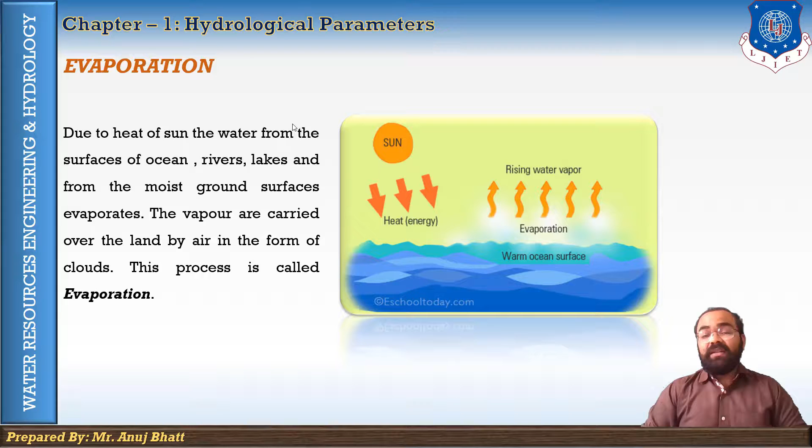Evaporation is the process by which water changes from a liquid state to a gas or vapor state. Evaporation is the primary pathway by which water moves from the liquid state back into the water cycle as atmospheric water vapor. Studies have shown that the oceans, seas, lakes, and rivers provide nearly 90% of the moisture in the atmosphere via evaporation, with the remaining 10% being contributed by the transpiration process that we will discuss in the

next lecture. A very small amount of water vapor enters the atmosphere through sublimation. It is the process by which water changes from solid, that is ice or snow, to the gaseous form, bypassing the liquid phase. This often happens in the Rocky Mountains with dry and warm Chinook winds. When the dry air hits the snow, it changes the snow directly into water vapor, bypassing the liquid phase. Sublimation is a common way for snow to disappear quickly in arid climates.

To continue evaporation, three basic conditions should be satisfied. First, there should be a constant supply of water. Second, there should be a constant supply of heat. And third, there should be a vapor deficit. Why does evaporation occur? Heat is necessary for evaporation to occur. Energy is used to break the bonds that hold water molecules together, which is why water easily evaporates at the boiling point, but evaporates much more slowly at its freezing point.

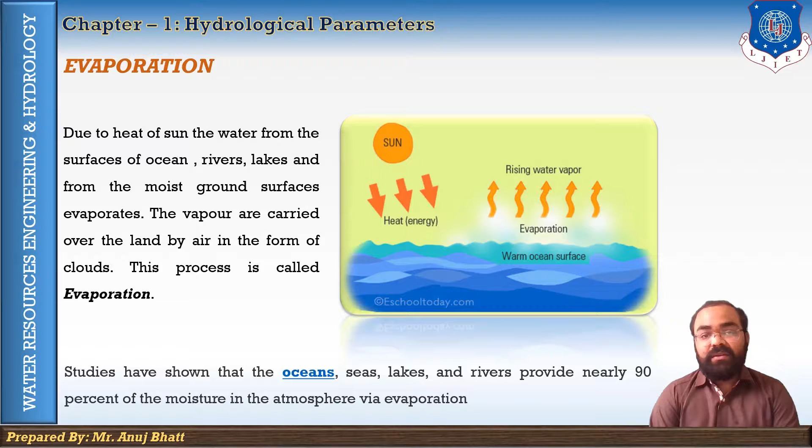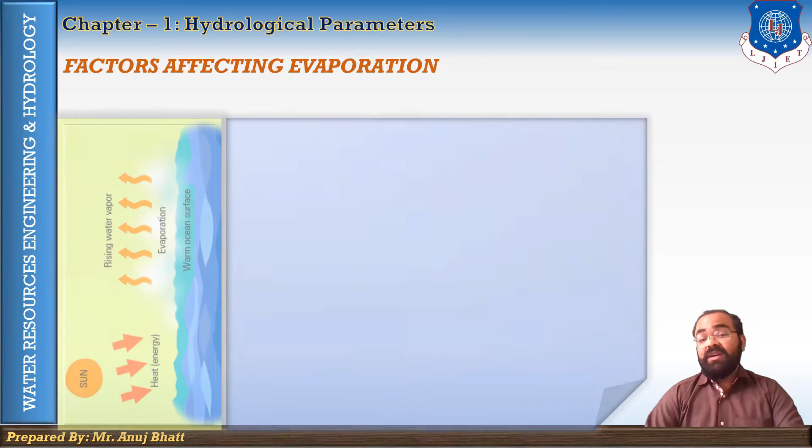Now next, let's discuss the factors that affect evaporation, or the rate of evaporation. The rate of evaporation depends on a few factors. The first one is the temperature of air. Evaporation increases with an increase in temperature, and thus in the summer season and in hot countries the evaporation will be more as compared to the winter season or cold countries.

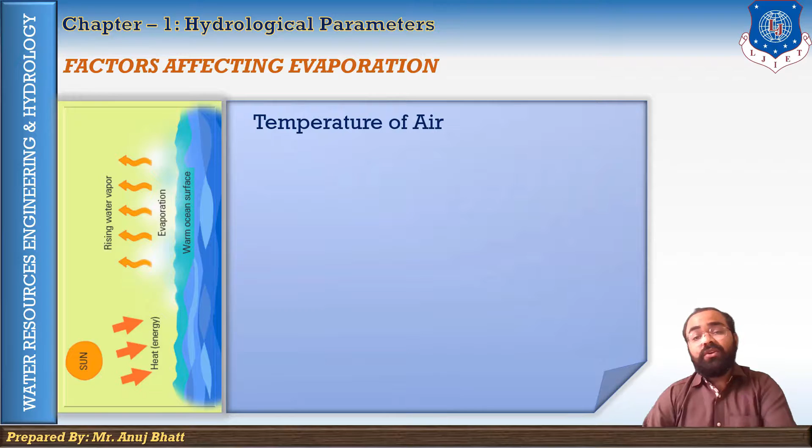The next is the wind velocity. The process of evaporation also depends upon the prevailing turbulence in the air. If the velocity of air is more, the saturated film of air containing the water vapor will move easily, causing more evaporation.

The next factor is the atmospheric pressure. A decrease in the atmospheric pressure always increases the rate of evaporation, because there are fewer molecules in the air above the free surface to cause interference. Consequently, the evaporation is more at high altitudes.

The fourth one is the nature of the evaporating surface. Different evaporating surfaces like soil, barren land, forest area, houses and lakes affect evaporation to the extent of their individual potential. Black cotton soil helps evaporate soil water faster than red soil, because such soil absorbs incoming radiation more effectively, so it can have more evaporation.

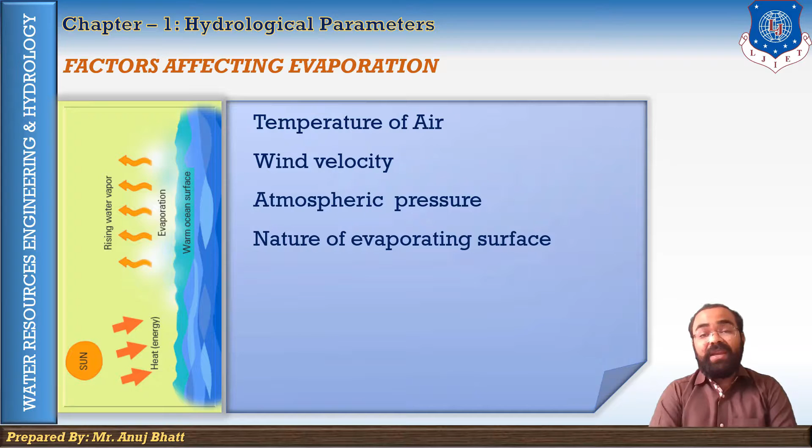Evaporation from wet soil is faster, and it reduces gradually as the soil becomes drier. Evaporation from a snow surface is less as compared to that from a water surface. Moreover, evaporation from snow takes place only when the dew point is below 0 degrees Celsius.

Talking about the area of water surface, the amount of evaporation is directly proportional to the area of evaporation. So if the exposed area is large, the evaporation will be more, and vice versa.

The next factor is the depth of the water body. The depth of water influences evaporation considerably. Deep water bodies evaporate slower than shallow water bodies in the summer, while in the winter season they evaporate faster.

The next factor is humidity. If the humidity of the atmosphere is more, evaporation will be less, and if humidity is less, evaporation will be more. Any dissolved salt in the water reduces the saturated vapor pressure of the water, which consequently reduces the rate of evaporation. Evaporation decreases by 1% for every 1% increase in the salinity of a water body.

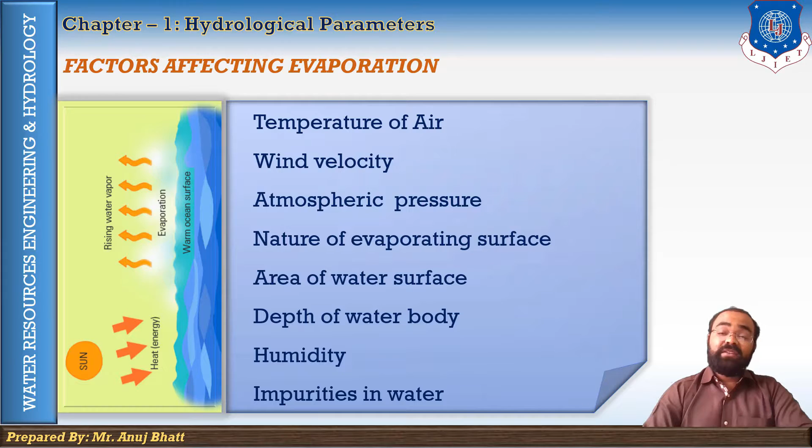The turbidity of water may also affect the rate of evaporation by affecting the heat transfer within the depth of the water body. So these are all the factors that affect evaporation and the rate of evaporation.

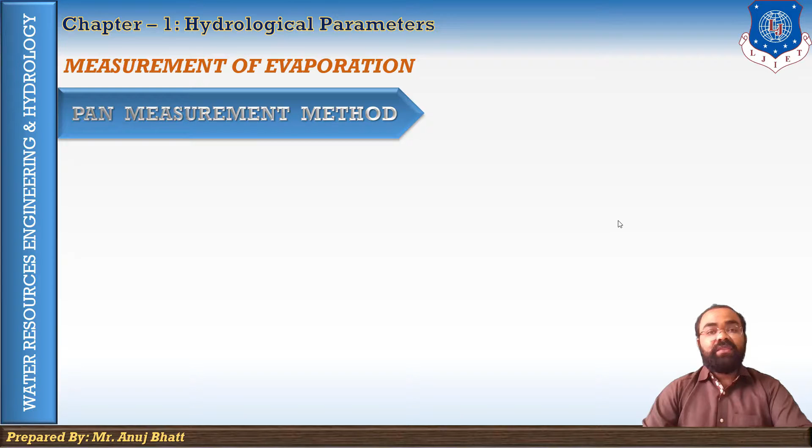Okay, next is the measurement of evaporation. We have the pan measurement method. The most reliable method for estimating evaporation from large water bodies is measurements from evaporation pans. Here, the depth of water evaporated from a pan of a given area in a given time is measured with the help of a micrometer.

The rate of evaporation so obtained is multiplied by a suitable pan coefficient to obtain the evaporation rate from the given water body. The pan coefficient is the ratio of lake evaporation to pan evaporation. In India, there are about 200 pan evaporimeter stations maintained by IMD, so we can easily get the rate of evaporation every year.

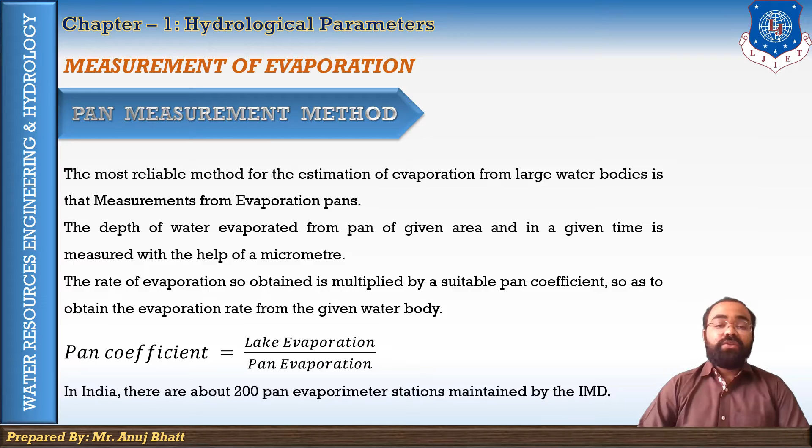Okay, next is using empirical formulas. The first formula is the Mayer formula: E equals Km times (es minus ea) times (1 plus v9 upon 16). For this method we just have to memorize the formula, and by finding all these terms we can find the rate of evaporation.

Here es is the saturation vapor pressure at the water surface temperature, ea is the actual vapor pressure at 9 meters above the water surface, and v9 is the mean wind speed at 9 meters above the ground level.

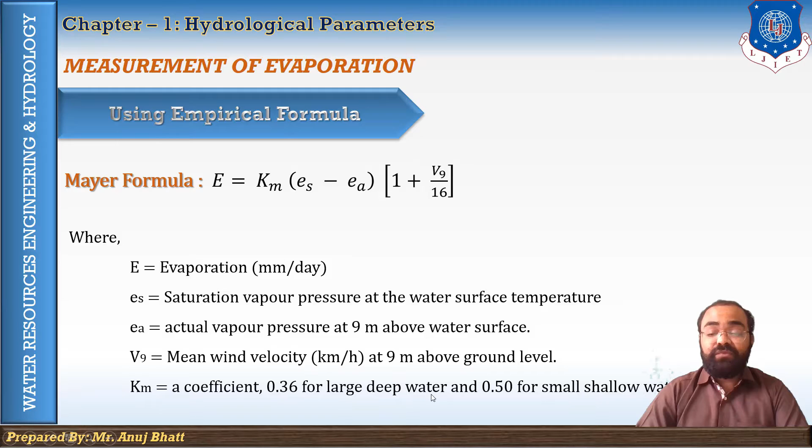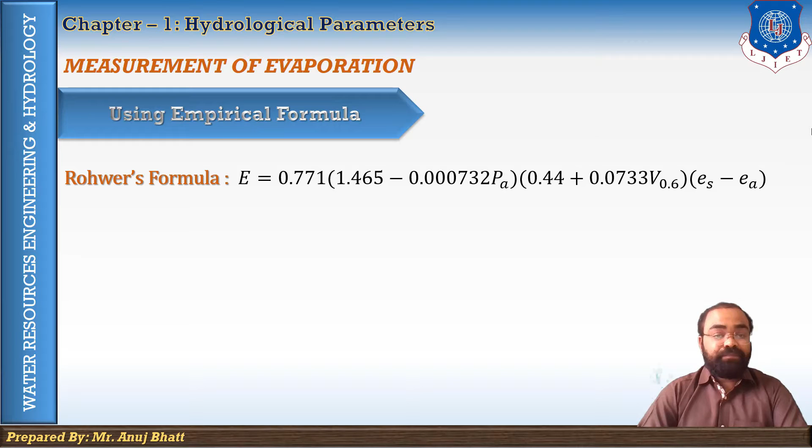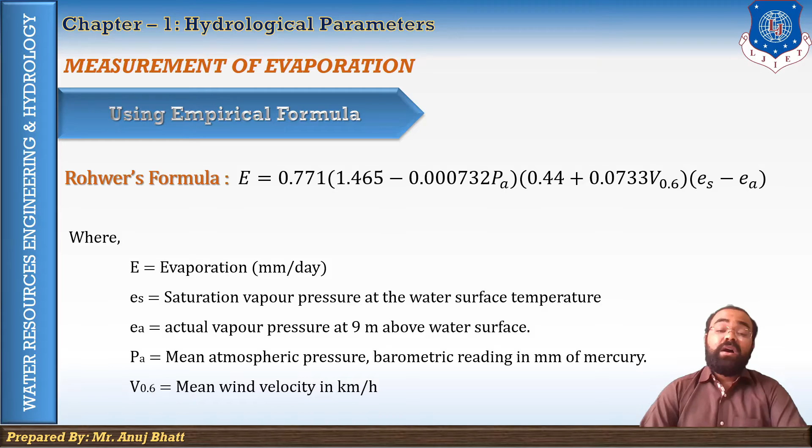Now km is the coefficient, that is, we can take 0.36 for large deep water and 0.50 for small shallow water. The second is Rohwer's formula. So this is Rohwer's formula, and these are the notations, where again es is the saturation vapor pressure, ea is the actual vapor pressure, the new term pa is the mean atmospheric pressure, and v0.6 is the mean wind velocity in kilometers per hour.

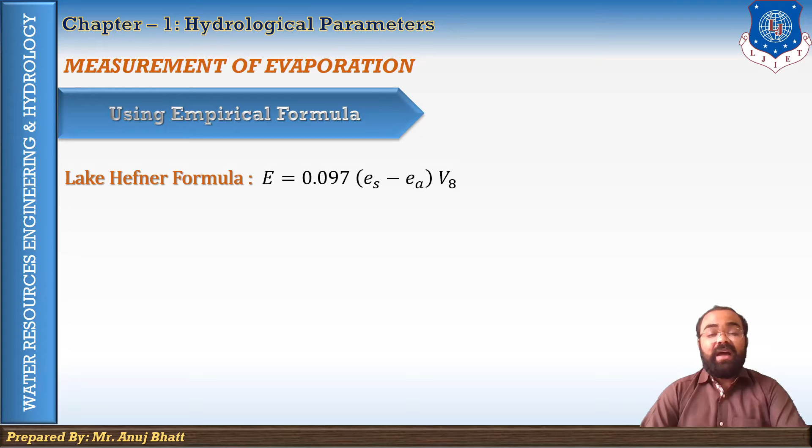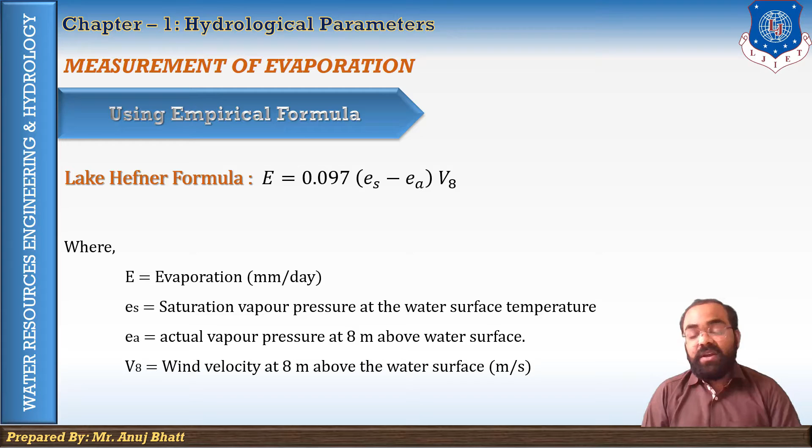The next empirical formula is Lake Hefner's formula. Here V8 is the wind velocity at 8 meters above the water surface. This is the formula. By this we can find out the evaporation rate. So whichever parameter we have, from that parameter we can find the evaporation rate. By using these empirical formulas, you measure one parameter, apply it in these equations, and you will get the values.

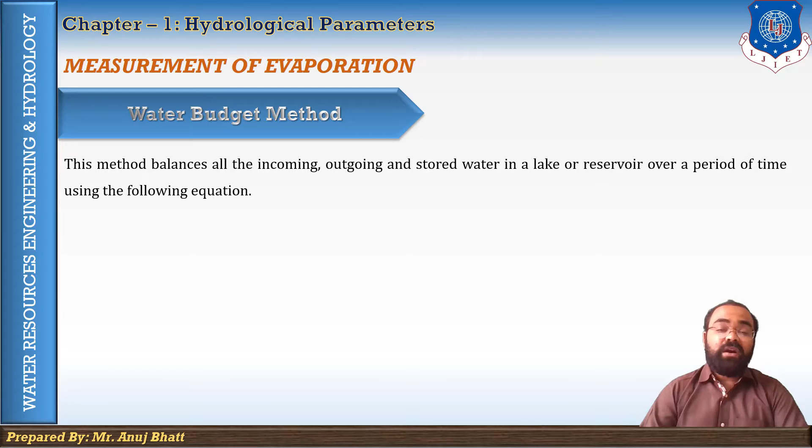Next method is the water budget method. This method balances all the incoming, outgoing and stored water in a lake or reservoir over a period of time, using the equation P plus Qi plus or minus Qu equals E plus Qo plus or minus delta Qs. This is the balance of incoming and outgoing water, and also the stored water.

So let's see what P is. P is the total precipitation, Qi is the total surface inflow. Same way, Qo is the surface outflow. Qu is the total underground inflow or outflow, delta Qs is the total change in storage, and E is the evaporation from the water surface.

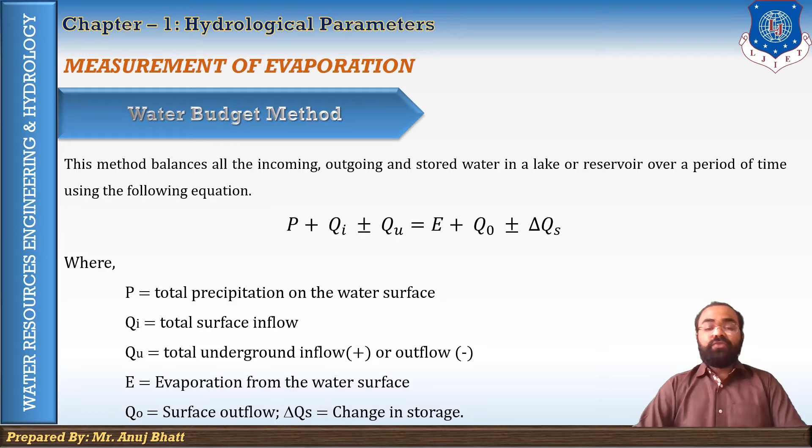Next method is the energy budget method. This method is based on the principle of conservation of heat energy and the cooling produced by evaporation. Thus, the energy available for evaporation is determined by considering the incoming energy, stored energy, and outgoing energy from a water body over a known period of time.